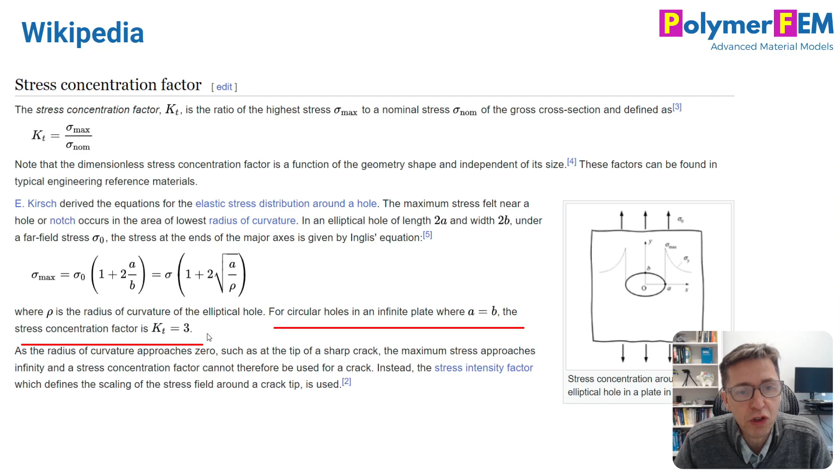So if we go to Wikipedia and we take a look at this answer here, we see a plate with a hole in it. For circular holes with an infinite plate, the stress concentration is 3. In some cases that is obviously true, but in many real cases that's far from true. One obvious problem here is that it refers to an infinite plate, and real materials are not infinite in size. If you have a smaller plate and the width is smaller than infinite, then the stress concentration goes down.

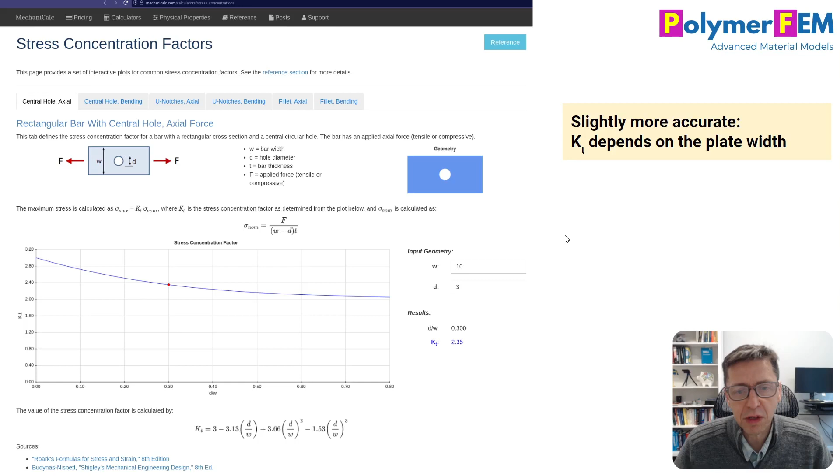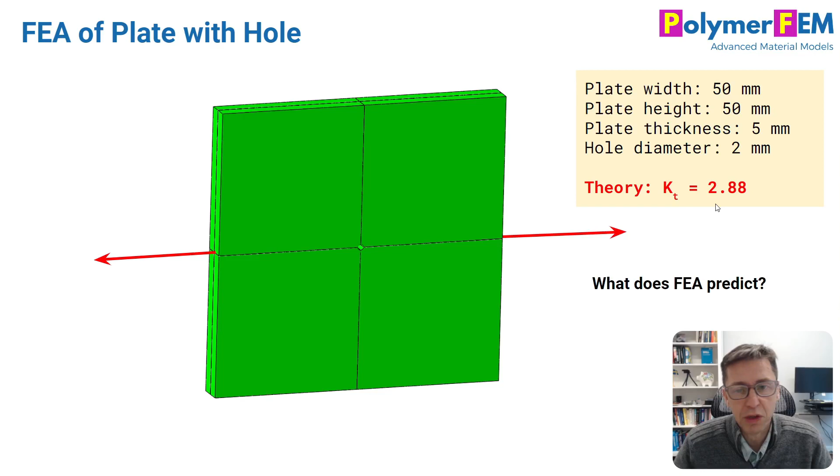But what does the finite element simulation say about this? Well, if I put in a Young's modulus, a linear elastic material model, and apply a strain of 0.2%, and I put in a bunch of higher order quadratic elements here, I get a stress concentration factor of about 2.81. So not too far from the textbook value that was 2.88. Pretty close. One can argue that it's pretty understandable why this finite element solution is a little bit lower than 2.88, because you need a very, very fine mesh to resolve the stress at the maximum location.

But we have missed something here, and this is really what I'm talking about. The big thing that's missing here is really, really important. And that is what I'm going to show next.

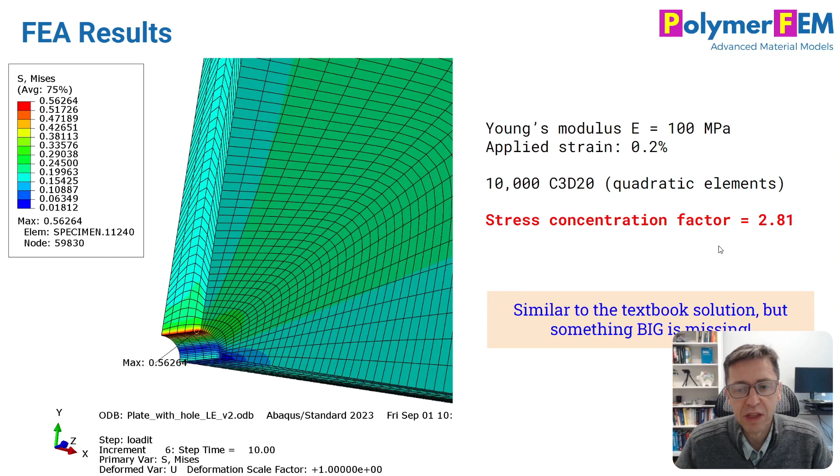So let's talk about the real material. So I just picked a material called PTFE. It's a Teflon material. This is a calibrated material model called the PolyUMod TNV model. I did all of this in MCalibration, our software. The experimental data for this Teflon is available. That comes with MCalibration. I just calibrated this material model to this data, and this is what I got.

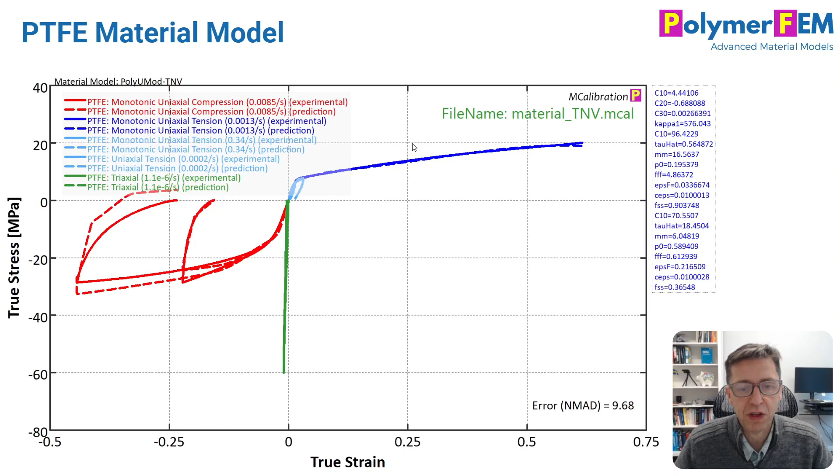So if I don't apply any strain, in the limit when the strain goes to 0, we get the stress concentration factor of 2.8 something according to theory. So it works. But take a look. If I apply a little bit of finite strain, the stress concentration factor goes down a lot. If I do 1% strain on this plate, in this case, I get a stress concentration factor of 1.9. It's nowhere near 3. If I do 2% strain, I get a stress concentration factor that is almost 1.6. So that is half what the textbook value is.

So the point is, the stress concentration factor is obviously also very strongly dependent on the material itself, the material model, and how much strain you apply. And that's of course because the material is viscoplastic. In real life you don't get the linear elastic response that this closed form equation that people keep talking about is based upon. In real life that is not true. You get viscoplasticity, and that brings down the stress concentration factor tremendously.

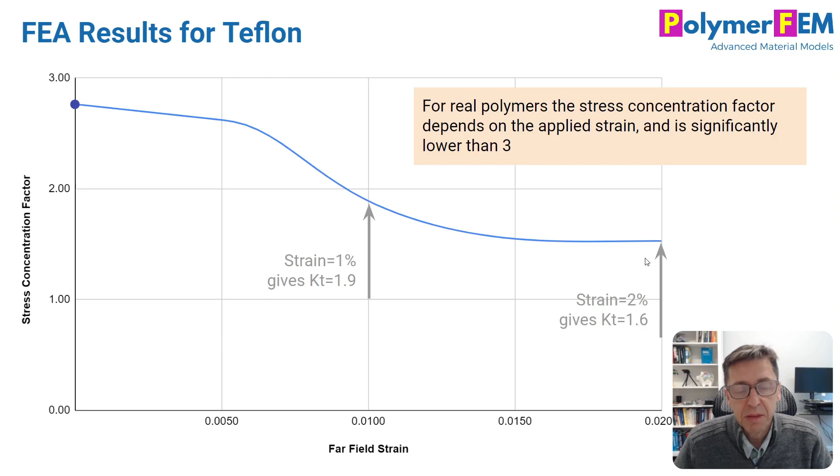But on the other hand, we can use this finite element simulation to also look at the strain concentration factor. How much higher is the strain at the edge of the hole compared to far away? It starts at 2.88 according to theory at small strains. But then it goes up a lot. So at 2% applied strain, we get a strain concentration factor that's 4.5, substantially higher than what the textbook value is.

So there's a lot to think about here, right? Just simply using these textbook values for stress concentration factors doesn't necessarily apply at all if you have more than 1% strain and you have a polymer material of any kind. You tend to have a much lower stress concentration factor, but on the other hand, the strain concentration factor will be higher. So this is important to keep in mind as you use these rules of thumb, because you can get into a lot of trouble otherwise.